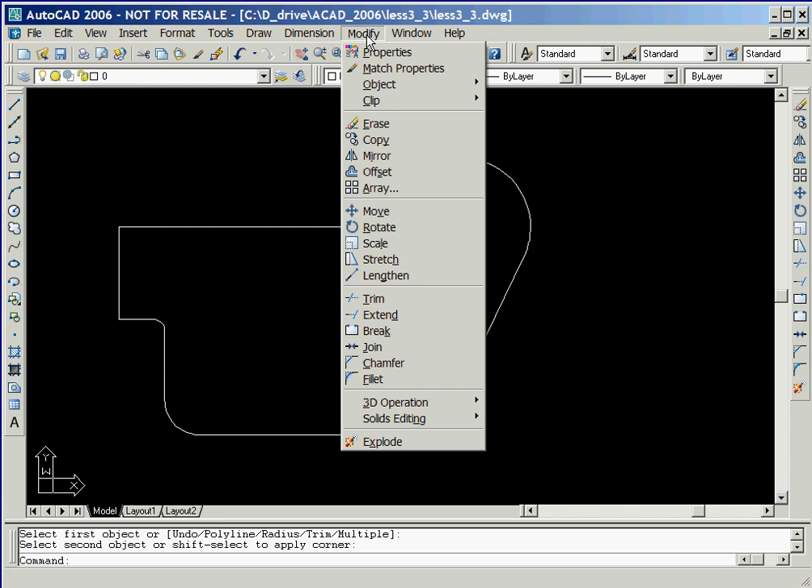Our next step is to convert the lines and arcs which define the outline of the figure into a polyline. We start this process by selecting Modify and then Polyline from the pull-down menu. We'll now click on one of the objects. In response to the current prompt that is asking if we want to turn the selected object into a polyline, we'll accept the default response, which is yes, by pressing the Enter key.

Now we'll click the right mouse button to display the pop-up menu shown here. Notice that the same commands are listed in the command window and can be entered using either the keyboard or the mouse. We'll use the mouse and select the Join option, which allows us to add other objects to the polyline.

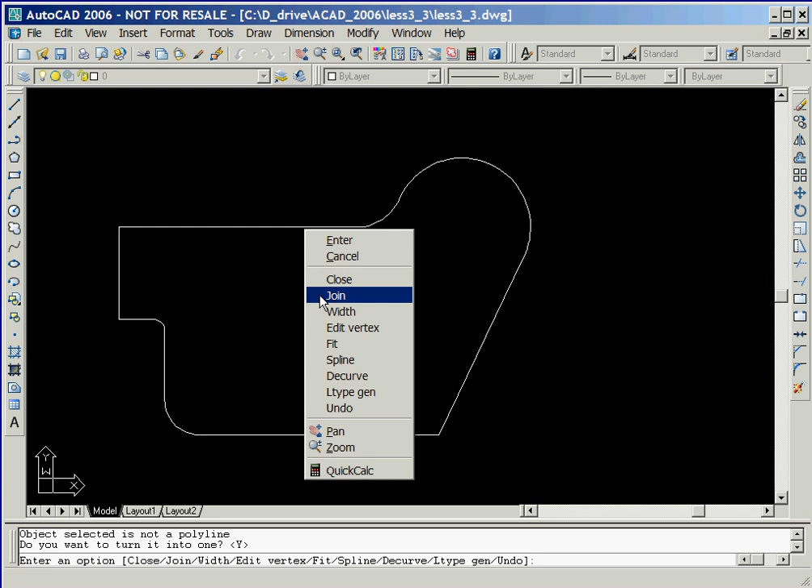In order to select the other lines and arcs, we'll place a selection window around them. This is done by clicking the left mouse button and holding it down while dragging the cursor to the opposite corner of the window. We now click the left button once more to define the window. And now we'll right-click to accept the highlighted objects. We'll now right-click again and select the Enter option to end the polyline command.

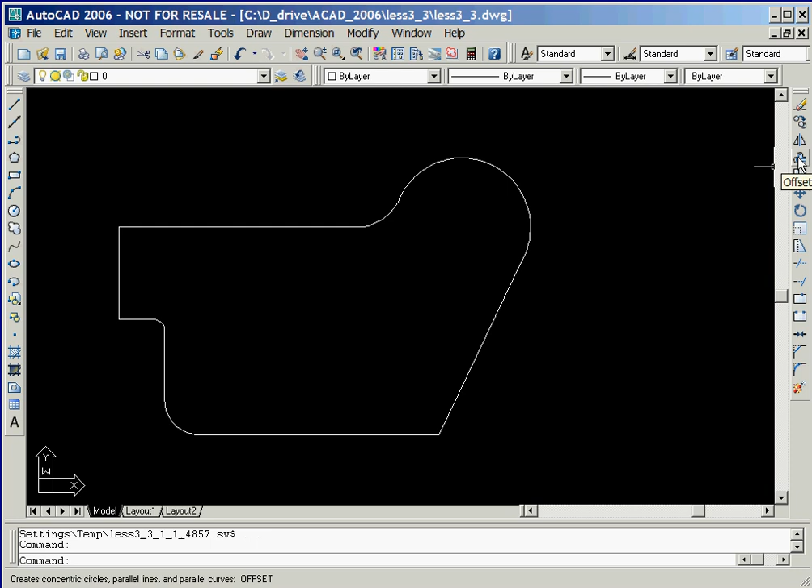Our next step is to create another polyline that is offset a constant distance from our current polyline. We'll start this process by clicking on the Offset icon in the Modify toolbar. The offset distance is 0.5, which we'll key in now, followed by pressing the Enter key.

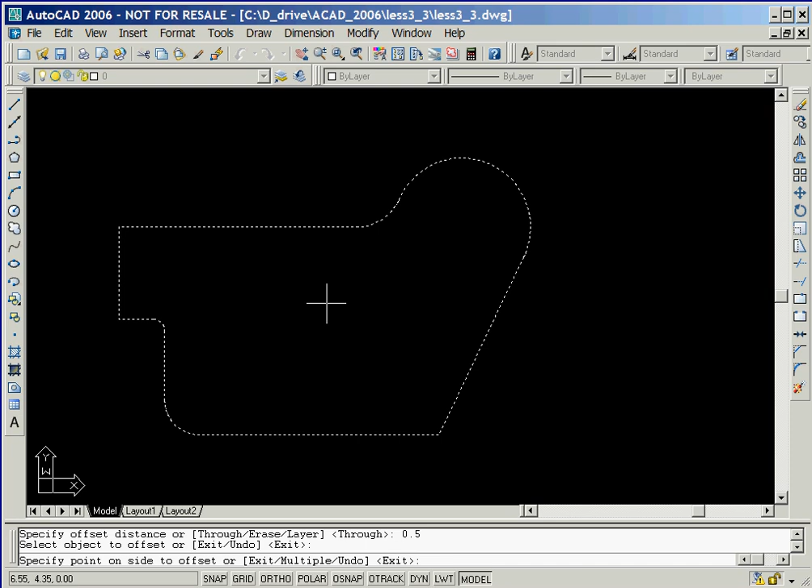We'll now select the polyline. Notice that all lines and arcs are highlighted. This is because they've been combined into a polyline. In response to the current prompt that asks us to identify the side of the offset, we'll make sure that the cursor is located inside the polyline and then click the left mouse button. We'll now right-click to end the offset command.

Our next operation will reverse the process performed by the polyline command. We'll do this by first selecting the Explode command icon located on the Modify toolbar. We'll now left-click on the polyline that was created with the offset command. And now we'll right-click to end the selection process and cause the polyline to be broken up into the individual lines and arcs.

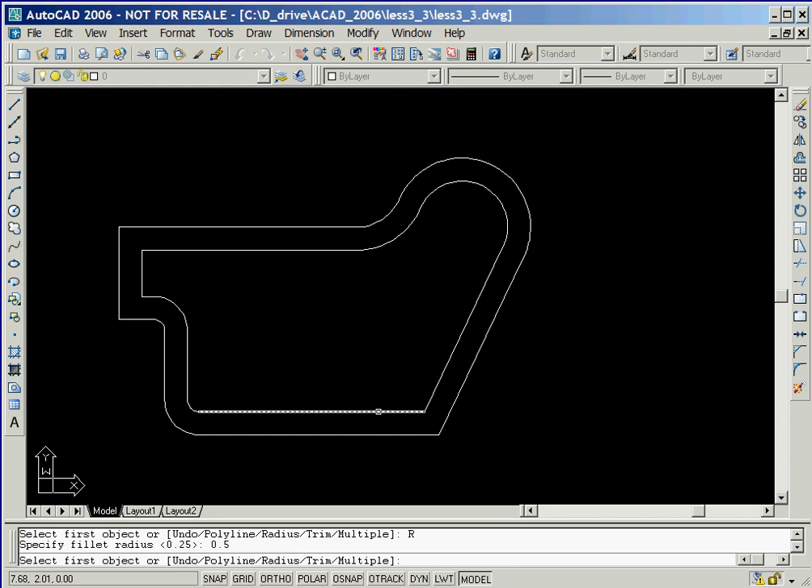The final object that we'll create is a fillet, so we'll now select the fillet icon. Since the current radius is set to 0.25, we'll right-click the mouse, which causes the pop-up menu to be displayed. We'll now select the radius option and key in 0.5. Now we'll select two intersecting lines where the fillet is to be placed. Our last step is to save the drawing.